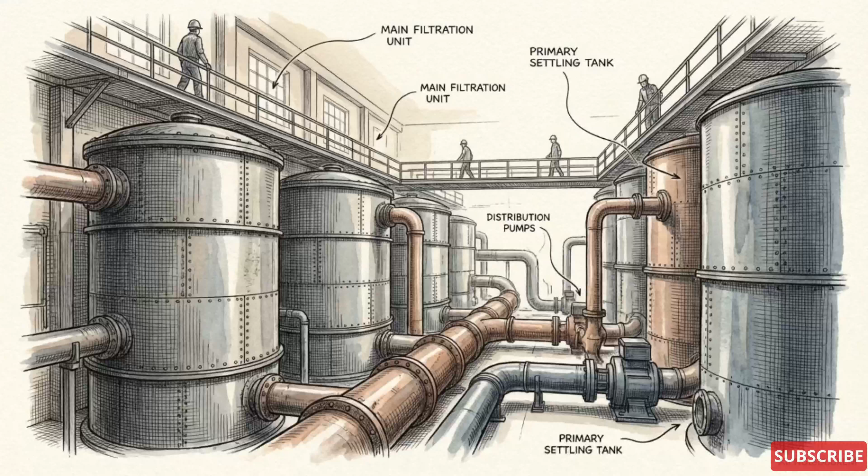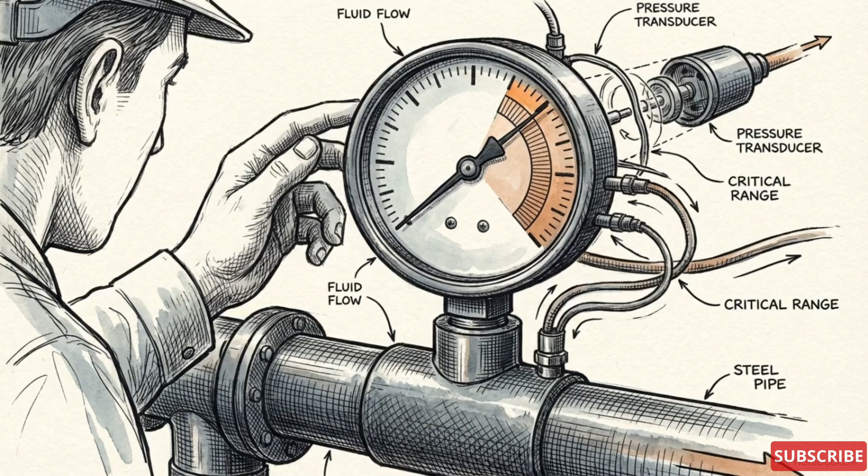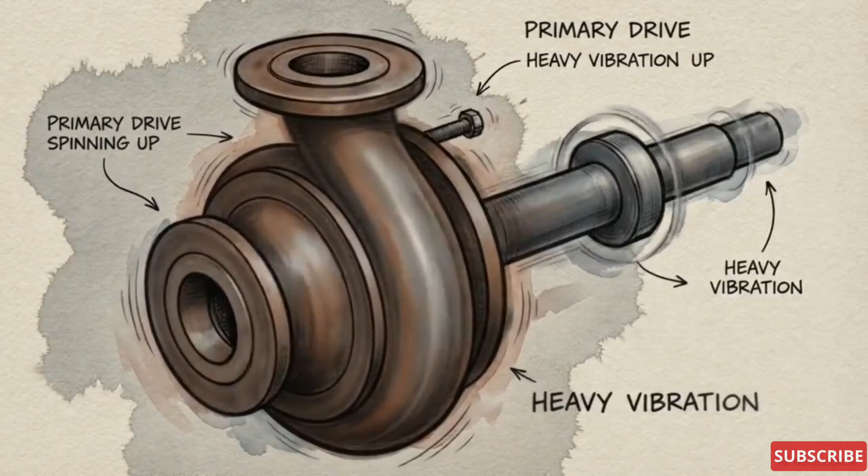Walk into a municipal water plant or industrial facility, and you'll see operators making daily rounds. When they check a pump, the primary metric they look at is the discharge pressure gauge to confirm the system is hitting its numbers. When a massive industrial machine kicks on, you can feel the physical force vibrating through the concrete. Because of that raw power, it is easy to assume that the number on the discharge gauge represents the exact amount of work the pump is exerting. But that math is incorrect.

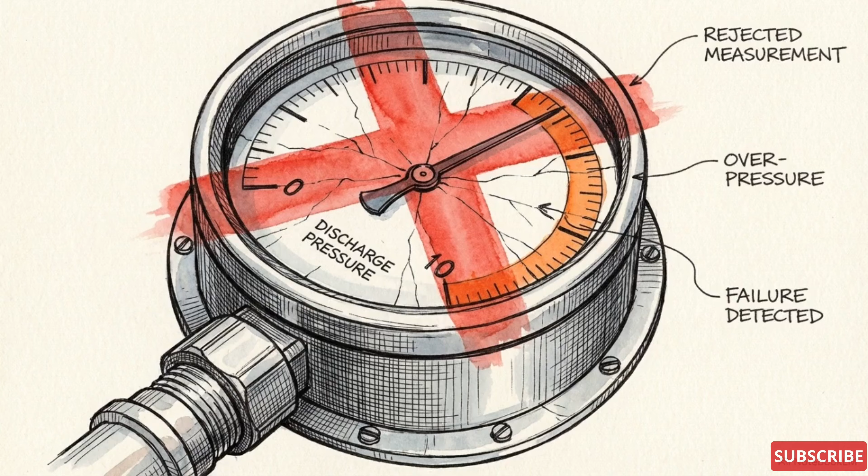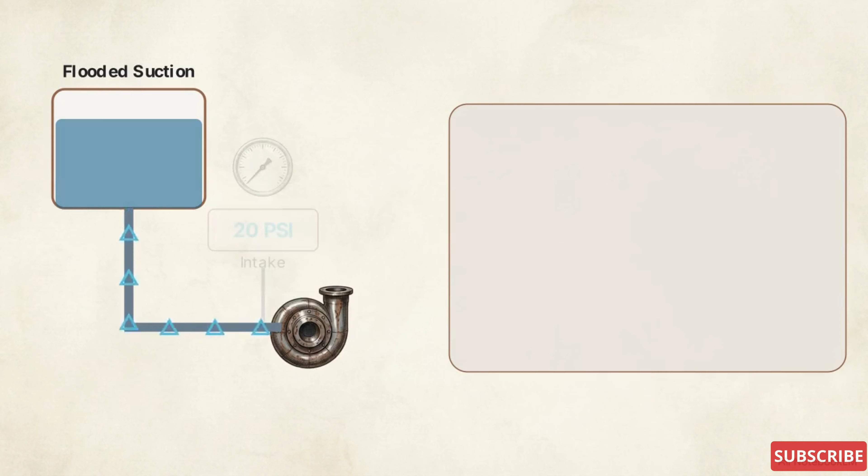A discharge reading of 100 psi does not mean the pump mechanism itself actually added 100 psi of pressure to the fluid. To understand the actual workload, we have to evaluate the intake side. In a flooded suction setup, the water source sits physically above the pump. Gravity pushes the fluid down into the casing, providing a positive starting pressure before the impeller even turns, say 20 psi. The pump only has to make up the difference. It takes that initial 20 psi and raises it to the 100 psi target. The machine is only performing 80 psi of actual work.

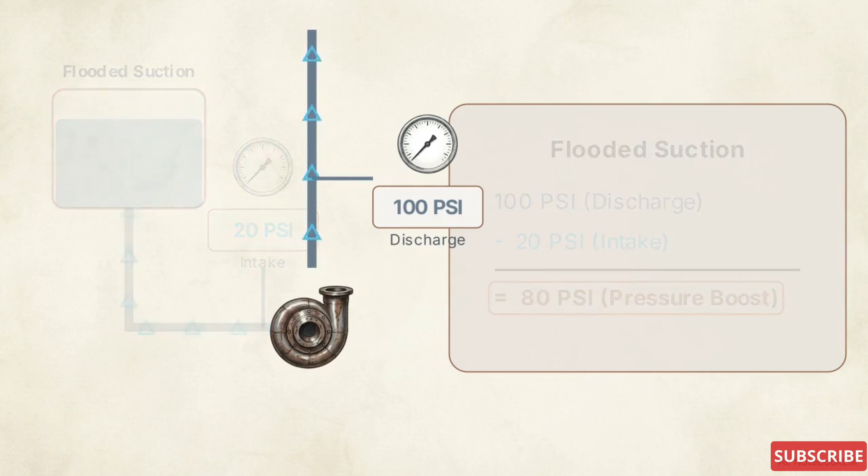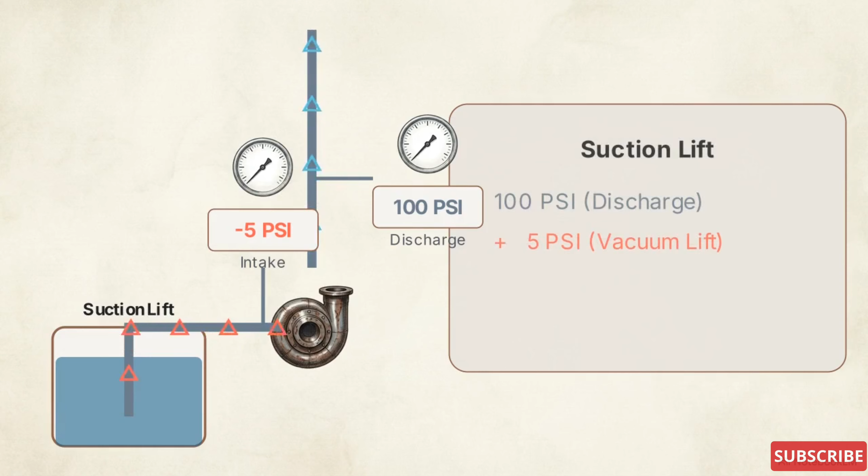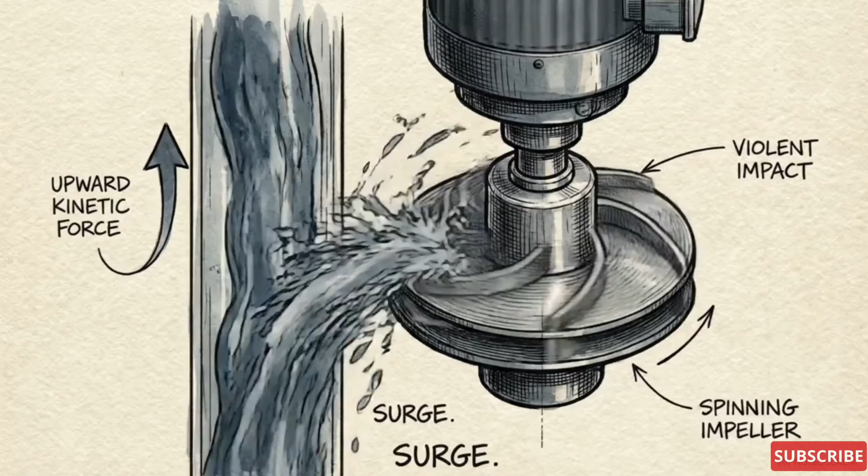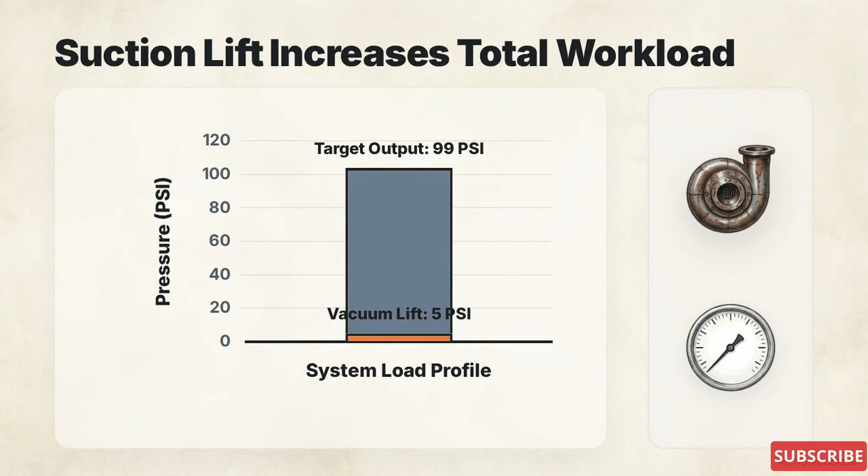The physics invert completely in a suction lift scenario. Here, the water source sits below the intake. Before the pump can push anything forward, it must pull a vacuum, perhaps -5 psi, just to draw the water up into the housing. That initial vertical pull requires immense mechanical effort. The fluid is actively fighting gravity every inch of the way upward before it ever makes contact with the spinning impeller to be pressurized. Because the pump starts in a negative pressure deficit, hitting that same 100 psi discharge target requires more energy. You add the 5 psi of vacuum lift to the 100 psi of required output, resulting in a total mechanical workload of 105 psi.

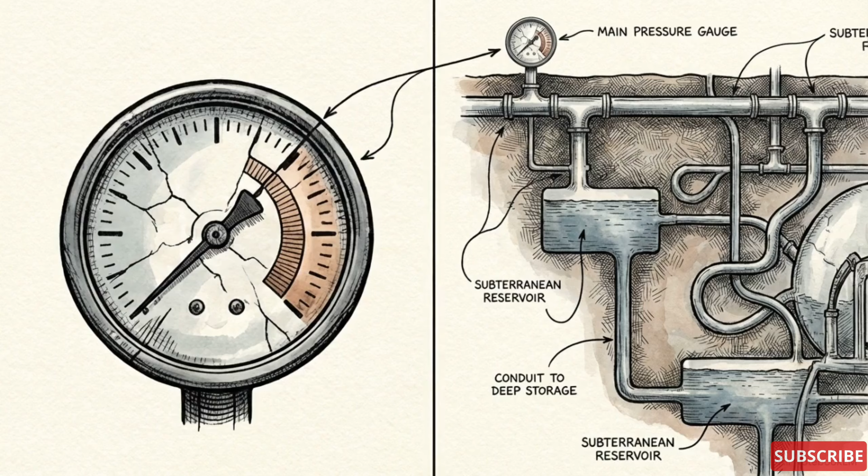This isolation of the machine's actual contribution, the discharge minus any positive intake pressure, or plus negative vacuum lift, is defined as the pressure boost. If an operator evaluates a pump by reading the discharge gauge in isolation, they lack the context needed to identify the system's actual energy demand. To accurately calculate that workload during the design phase, engineers must look past the mechanical equipment itself and map the physical geography of the entire piping network.

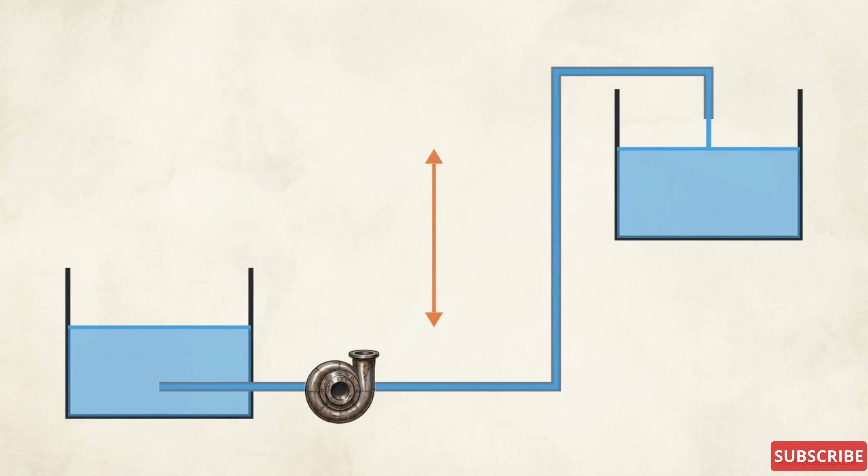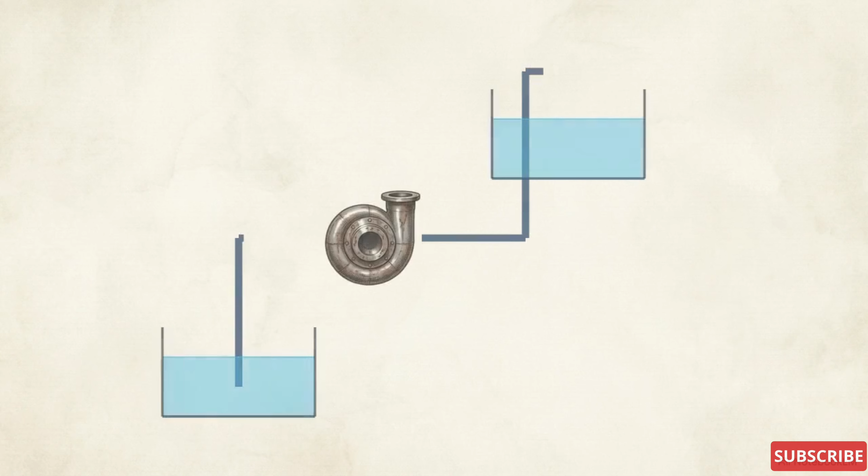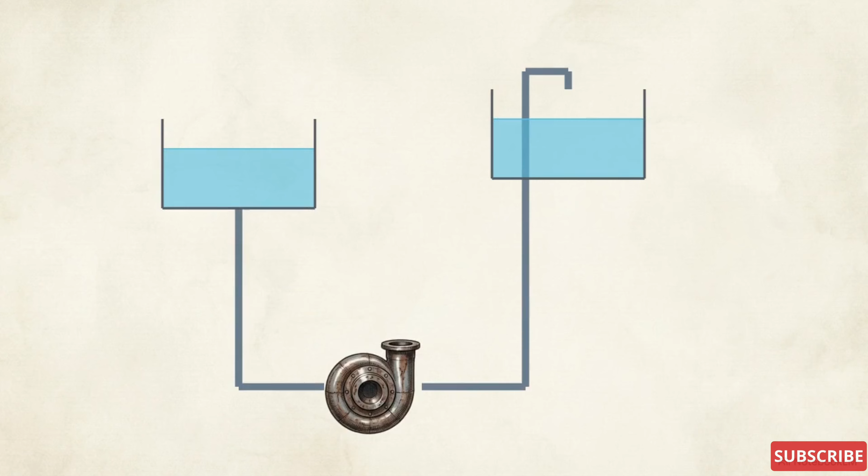Contrast that with alternative B. Because the supply reservoir sits above the pump, creating a positive suction head, that initial elevation advantage reduces the total vertical distance the machine has to overcome.

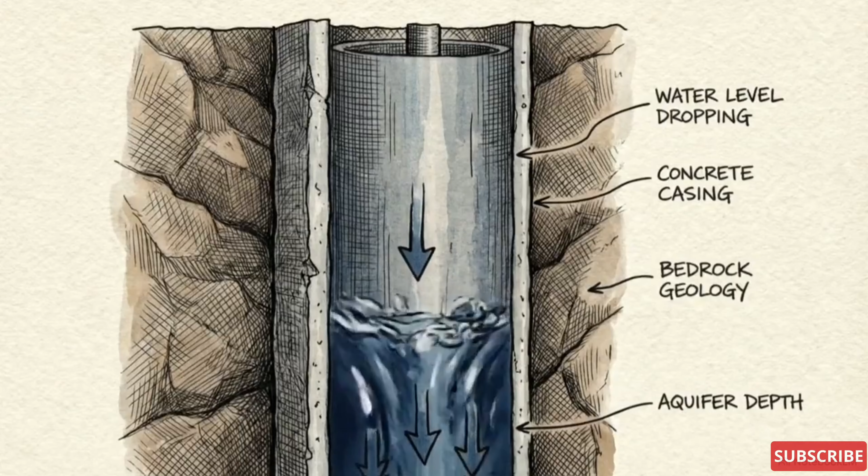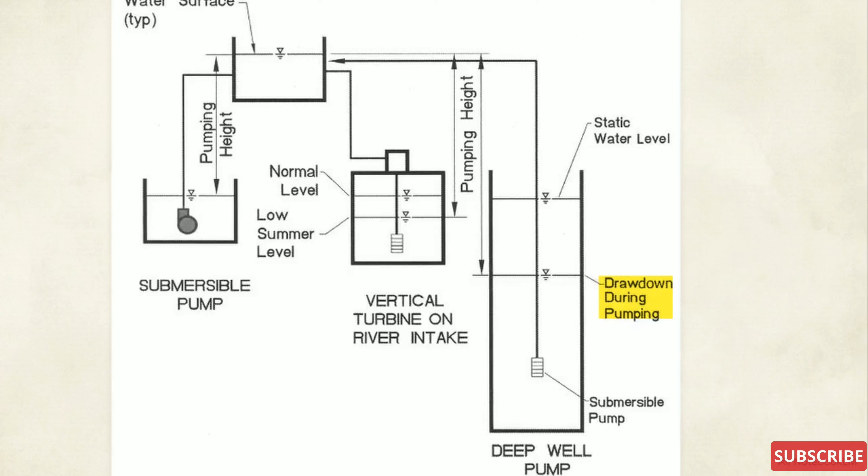Environmental sources introduce a shifting variable. When drawing from a deep well, the starting elevation of the water is rarely constant once operation actually begins. This schematic of miscellaneous pump systems highlights the environmental variation on the far right. Look at the bracket labeled Drawdown during pumping. When a high-capacity pump activates, it rapidly drains the immediate column of water, dropping the localized surface level. Engineers must plot this lowest anticipated final pumping level to establish a safe, conservative static head calculation.

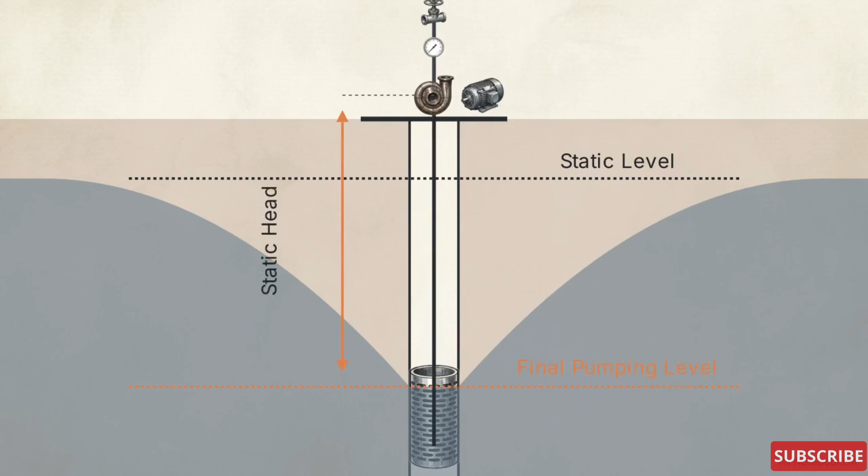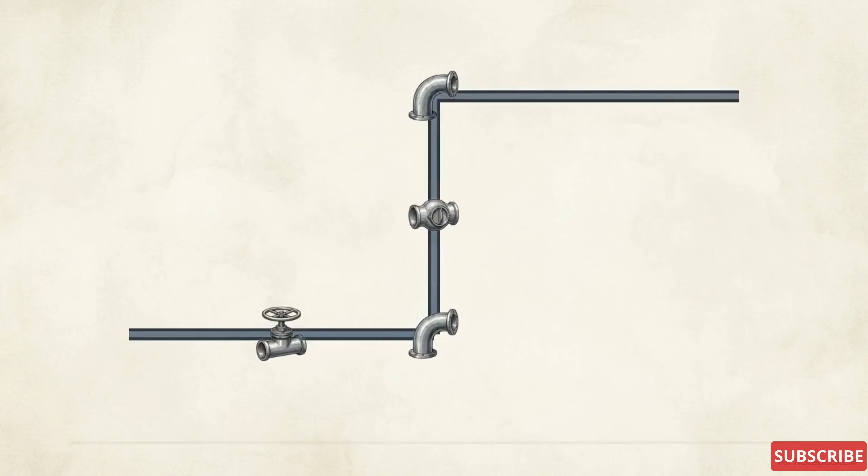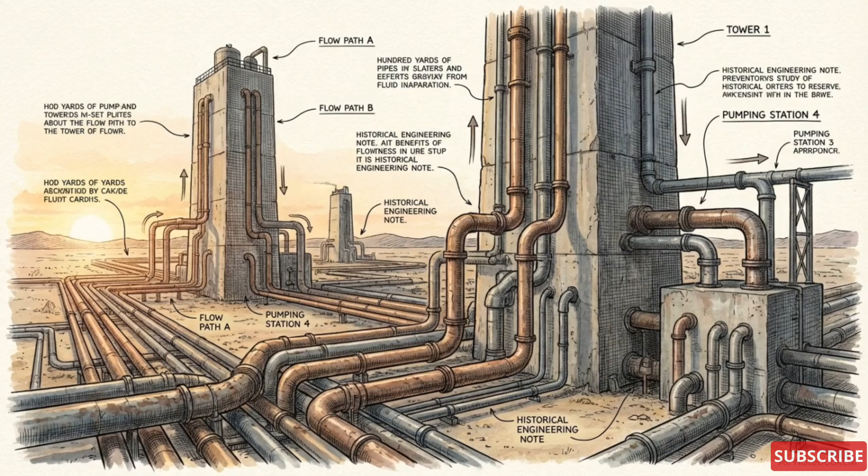Gravity is not the only force stealing energy. As water travels, the friction of scraping against pipe walls, navigating sharp elbows, and squeezing through control valves creates continuous, measurable resistance known as friction loss. By summing the maximum vertical static head and the total pipe friction loss, we arrive at the foundational metric for sizing equipment: total head, or total pump pressure. Total head proves that a pump's required workload is dictated by the physical geography of the site and the geometry of its pipes, regardless of the size of the motor bolted to the floor.

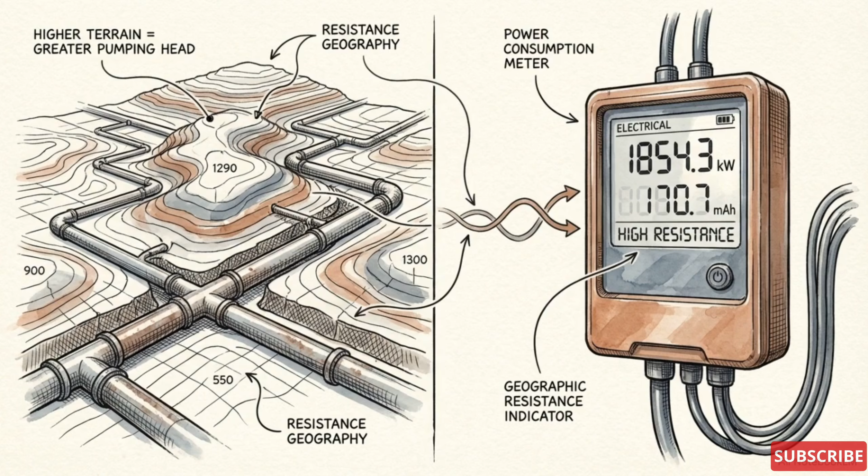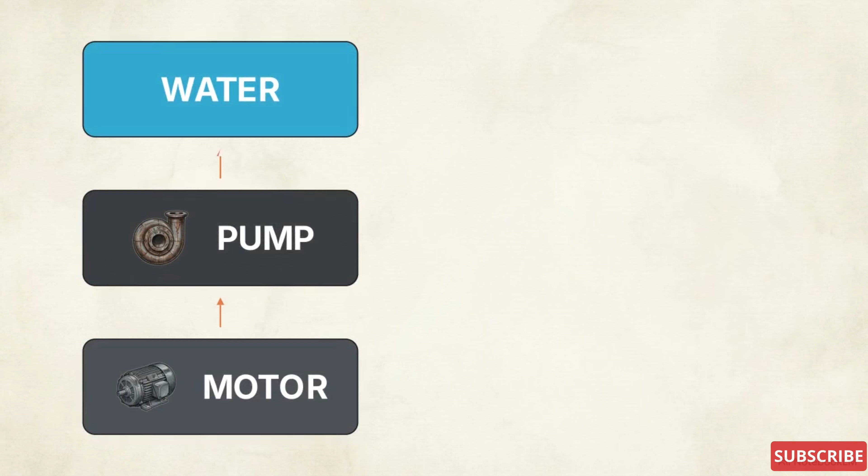Once the total head is mapped, we can translate that physical geographic resistance into the exact electrical power required to operate the system. We visualize this calculation as a three-tier cascade of power transfer. Energy is drawn from the electrical grid at the bottom, passed through the mechanical pump in the middle, and finally delivered into the fluid at the top. The top tier is water horsepower.

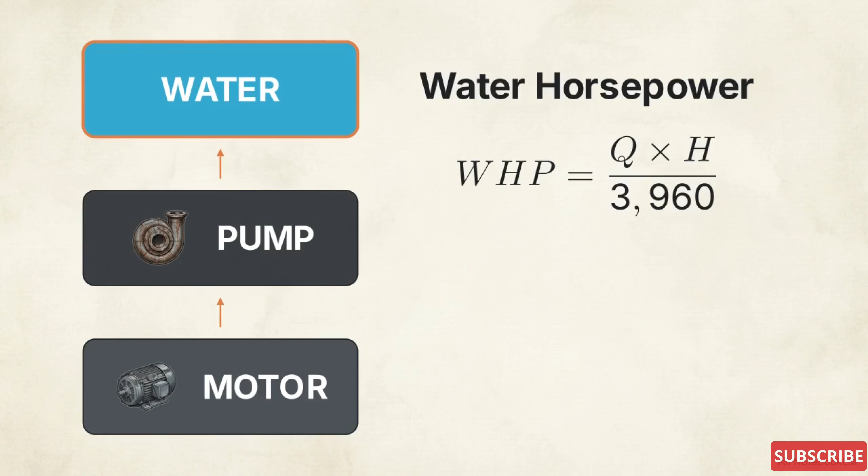This represents the pure, theoretical physical work required to lift a specific weight of water to a defined height every minute. It is calculated by taking the design flow in gallons per minute, multiplying it by the total head in feet, and dividing that product by a standard mathematical constant of 3,960. However, water horsepower is an idealized number. It assumes a perfect machine transferring 100% of its kinetic energy to the fluid without any loss, a physical impossibility.

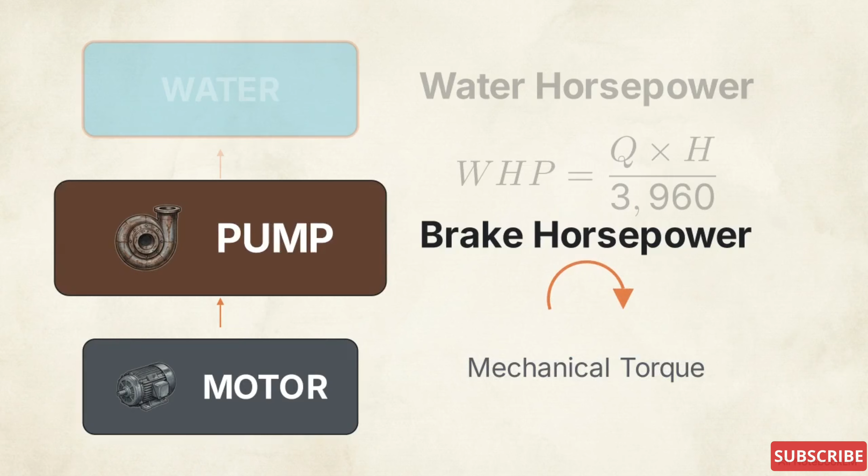Moving down the cascade, we reach the middle tier, brake horsepower. This is the actual mechanical torque the drive shaft must deliver to the impeller to hit the system's target. Brake horsepower accounts for the physical realities of the machinery. Energy is constantly lost to internal water slippage, the friction of routing fluid out of the discharge port, and axial thrust within the pump volute.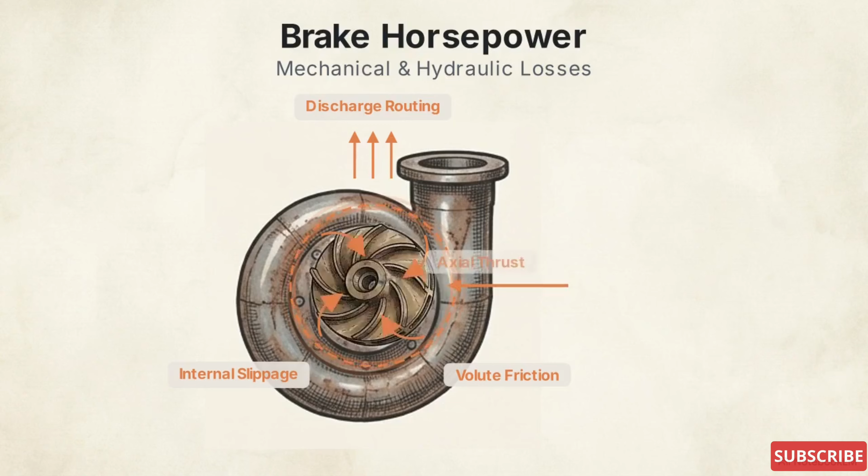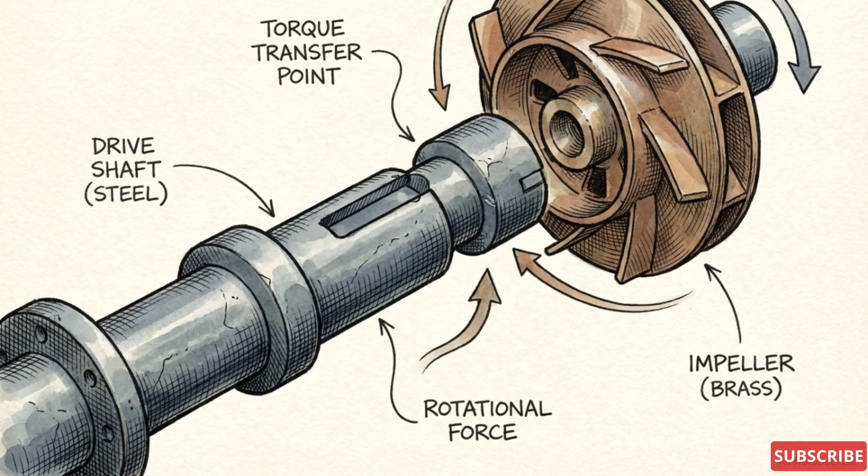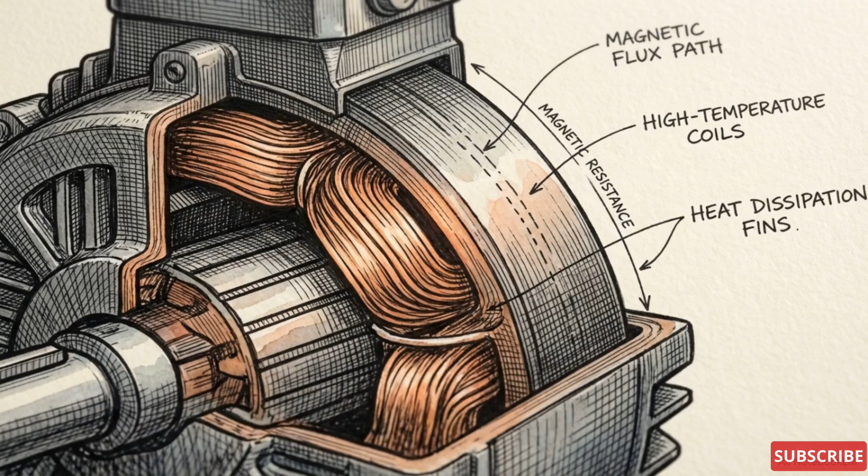To find the brake horsepower, we take the ideal water horsepower and divide it by the manufacturer's pump efficiency percentage. Because efficiency is always a fraction, this dictates a higher power input at the shaft. The degradation continues. The electric motor spinning that mechanical shaft suffers its own internal losses, bleeding energy away through waste heat and magnetic resistance in the copper coils.

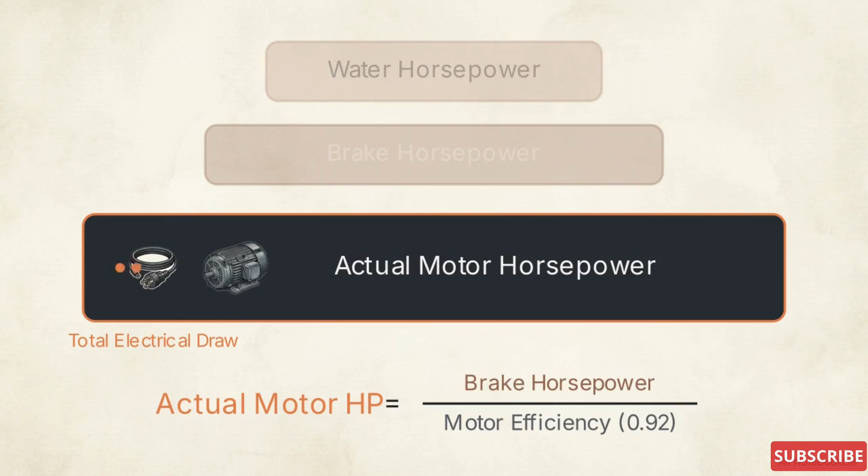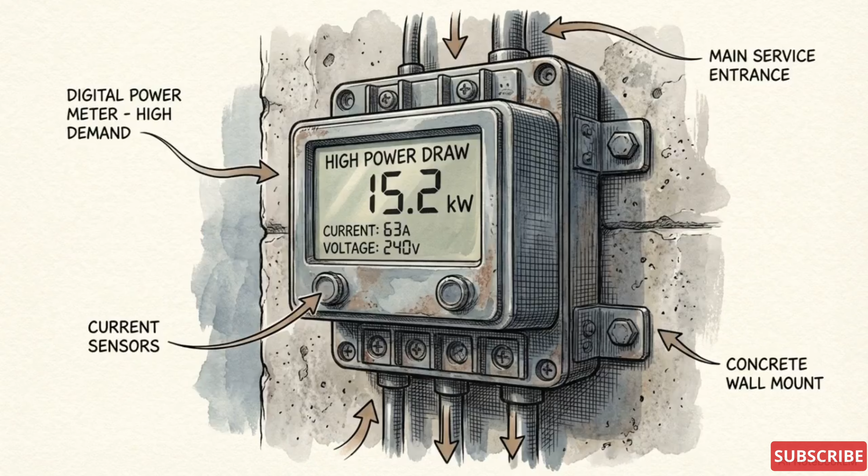This brings us to the bottom tier, actual motor horsepower. This metric dictates the final, total electrical draw required from the facility's power grid to keep the sequence running. The required motor horsepower is calculated by taking the brake horsepower and dividing it again, this time by the motor's specific electrical efficiency rating. Because of this cascading degradation through the motor and the pump, the electrical grid will always have to supply significantly more energy than what actually goes into moving the water.

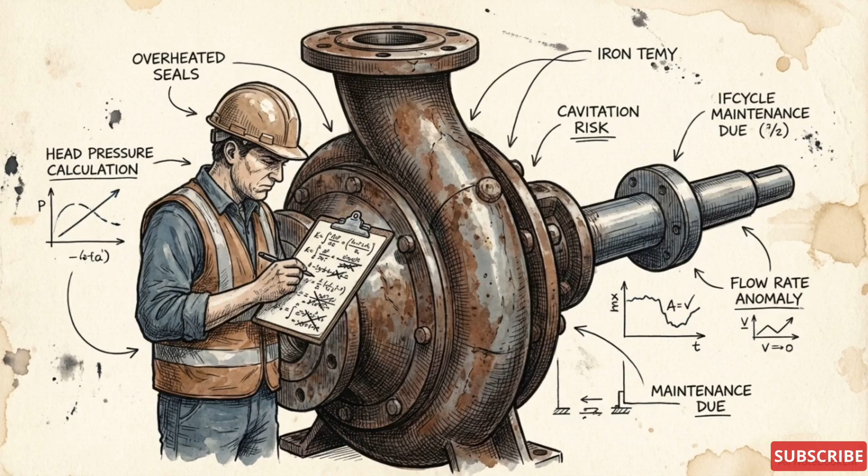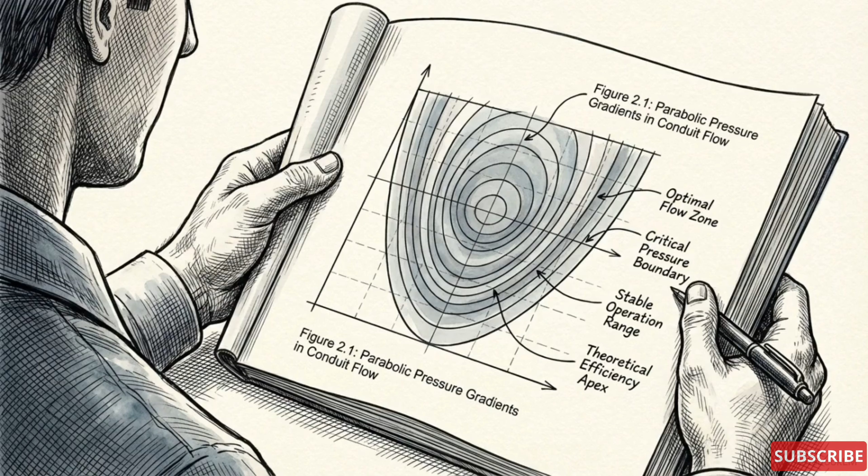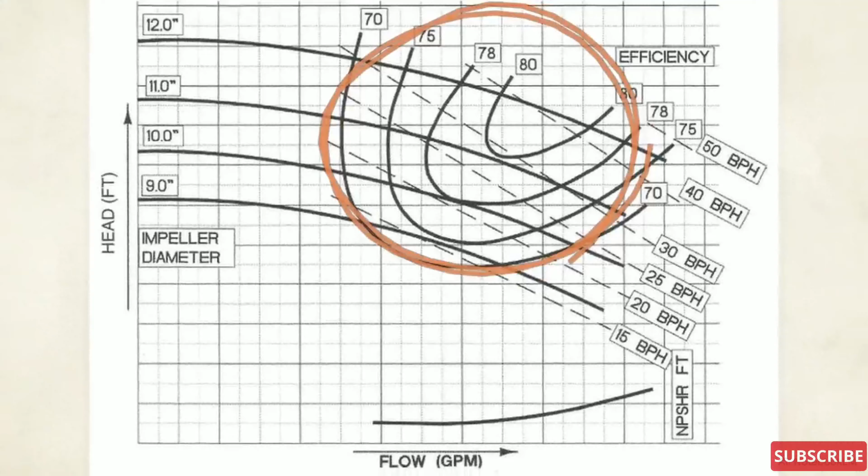Layered over this coordinate grid are several parabolic, U-shaped rings stretching across the top half of the chart. These are known as efficiency islands. Notice how the pump's mechanical efficiency peaks in the absolute center of these zones and steadily degrades as you move outward toward the extreme edges of its operating range.

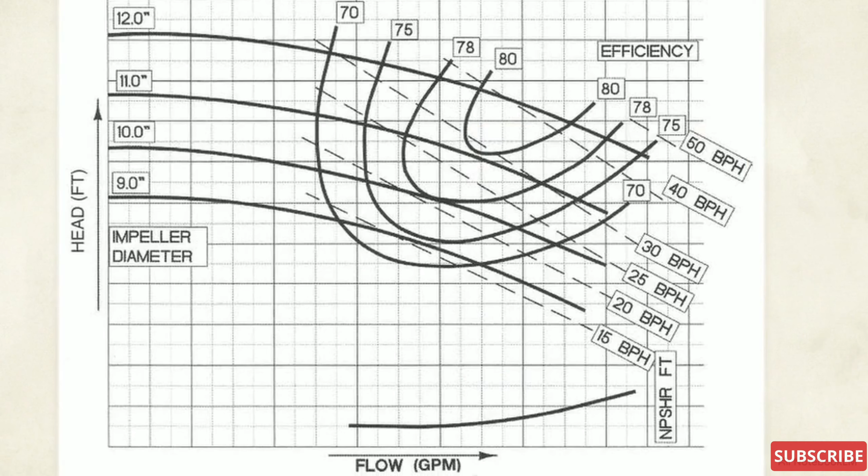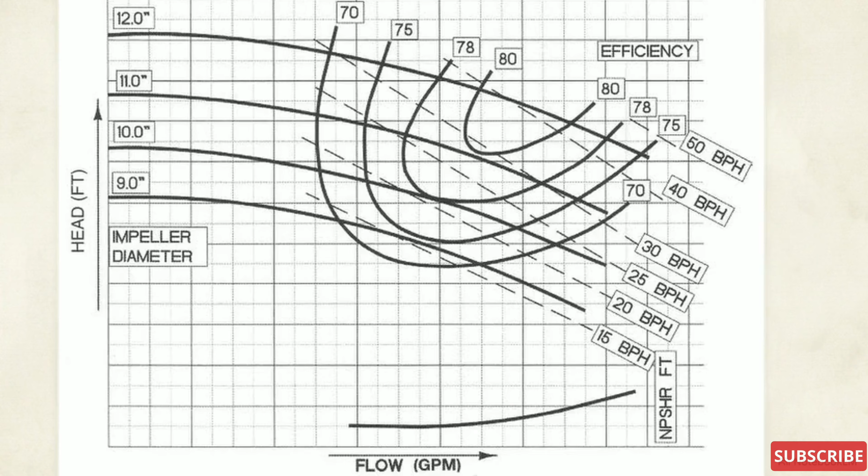Shifting focus down, you'll see a series of dashed diagonal lines slicing downward from left to right across the graph. These diagonal markers represent brake horsepower. Because the manufacturer tested the physical unit, the mechanical inefficiencies and internal fluid slippage are already mathematically baked into their placement. By locating where the required flow and head intersect, an operator bypasses the arithmetic entirely. This single graph instantly identifies the exact mechanical power the system demands at that exact moment.

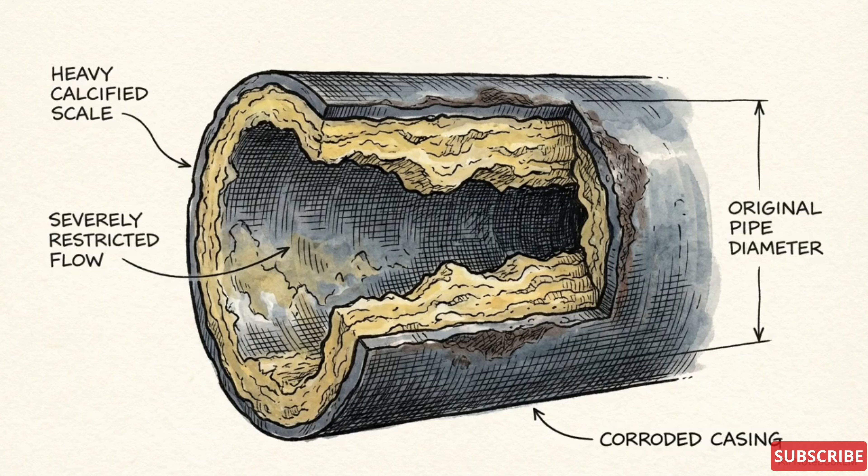Sizing a pump correctly on day one does not guarantee permanent efficiency. Over the lifespan of a facility, physical conditions change. Pipes calcify, demand increases, and equipment ages. When aging hardware struggles to keep up with these evolving demands, the mathematical cascade of power transfer begins to heavily penalize the facility.

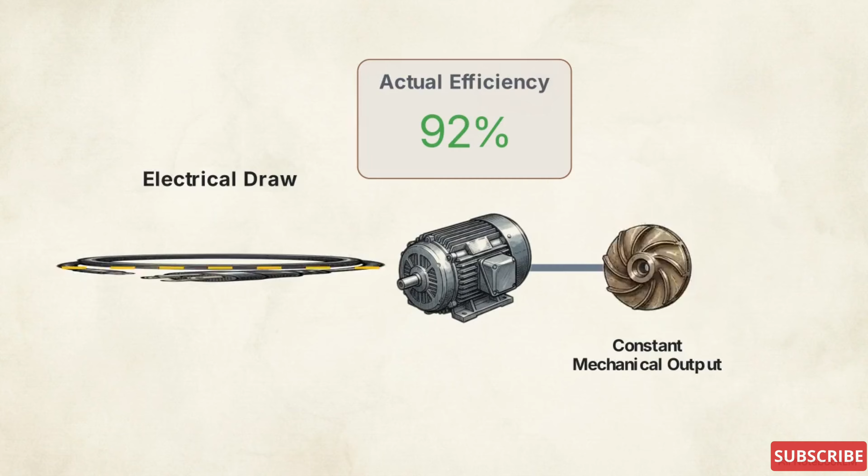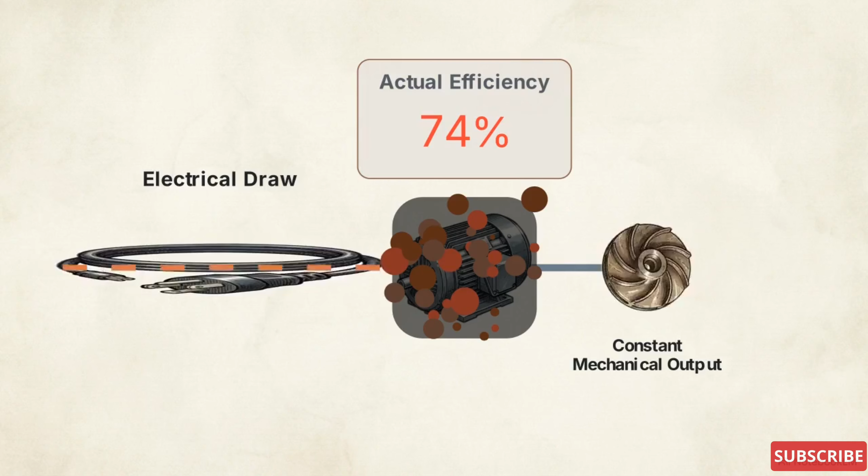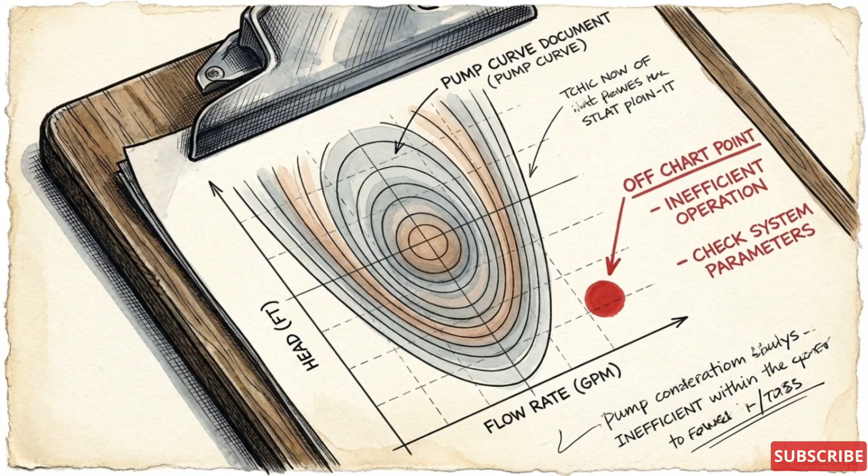Modern units are expected to operate at an electrical efficiency of 92% or greater. As older motors degrade, that percentage shrinks, pulling significantly more raw power from the grid to achieve the identical mechanical output. Simultaneously, external modifications, like restructuring an entire pressure zone, can alter the system's total static head, pushing a perfectly functional pump entirely out of its designed efficiency island. When physical geometry changes, the coordinate point migrates outward into a higher brake horsepower requirement.

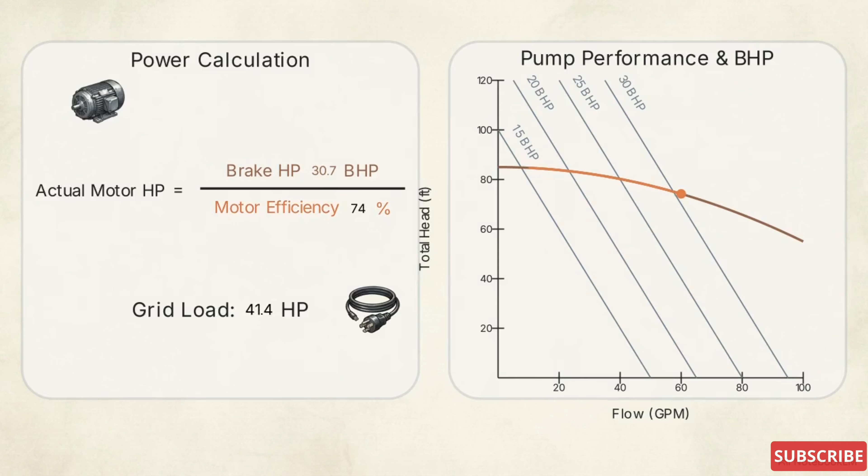As the motor degrades, the denominator in our power equation shrinks. Both force electrical loads to spike. This reality is why sizing criteria must be kept on site. When a system underperforms, maintenance personnel need those mathematical baselines to determine if the pump itself is failing or if the facility's geography has shifted.

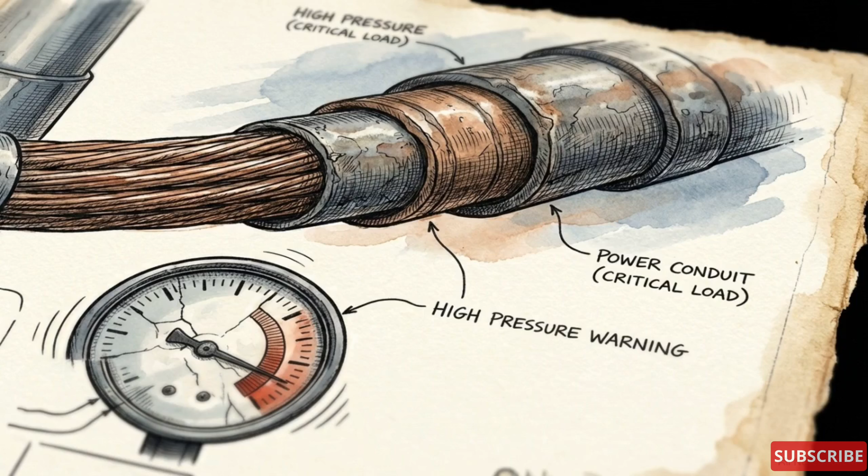Identifying system failure requires looking beyond the single data point of a discharge gauge to measure the gap between the physical lift of the fluid and the total electrical draw. The pump curve provides a persistent map of a facility's mechanical health and energy costs, making it a critical tool for long-term operational oversight.